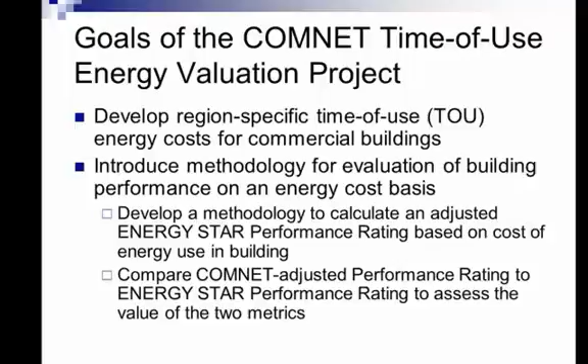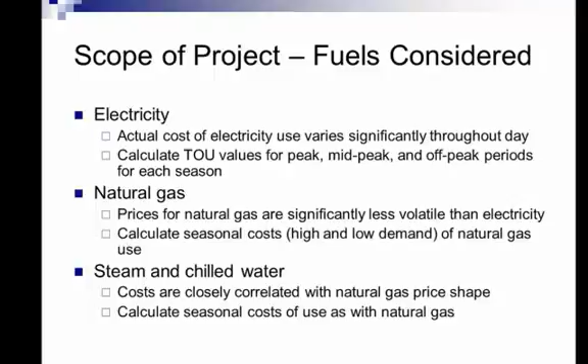Because we're doing an energy cost basis while Energy Star performance rating is in source energy, we have a different metric, and so you can get a COMNET adjusted performance rating from Energy Star, and we'll talk a little bit about that as well. So the scope of the project, and you will see this when you look at Chapter 5, is that we developed basically default values for energy by four different fuels: electricity, natural gas, and then steam and chilled water.

So for the electricity piece, what we try to do for each of the DOE climate zones is look at the actual cost of electricity. What does it cost to deliver a kilowatt hour by season in the peak of the day, mid-peak, and off-peak? So that probably looks quite familiar to a number of people who are used to looking at utility tariffs. There are time of use periods in many utility tariffs with different costs. We're actually fundamentally trying to capture the same thing.

It's higher cost to deliver energy on peak because of all the infrastructure required. So the cost differentials reflect both higher energy cost, worse heat rates in power plants, as well as additional infrastructure that needs to be built to meet the peak load.

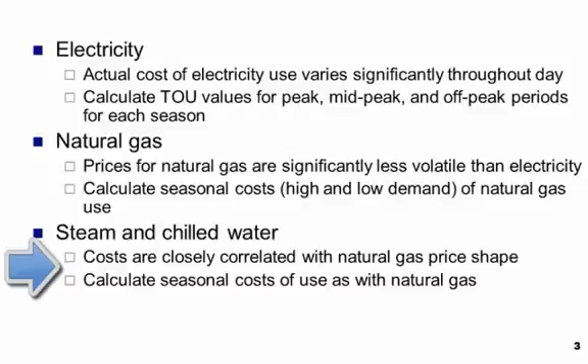For natural gas, there's less day-to-night volatility, but there is seasonal volatility linked to demand. So the natural gas values are higher in the winter, which is the heating season, than in the summer. There's less volatility, but still there are seasonal costs in the COMNET valuation. And then finally, we developed the cost for steam and chilled water. And those costs of developing steam and chilled water are closely correlated to the natural gas price shape. So you will see in there also seasonal cost differences.

So I think I mentioned already, but why use a TOU cost basis rather than just an average rate? What we're trying to do is reflect better the societal cost of providing energy to a building. And with efficiency and improvements to buildings looked at on this basis, we get a more efficient building from a societal value perspective that can help building designers design buildings that are less impactful to the grid and provide overall economic value.

In many parts of the country, the actual retail tariffs reflect the same underlying cost basis that we developed here, so there's a lot of similarities. But what we did is we took a standard method for developing the cost differentials for each of the regions in the country and applied them.

So the framework is consistent. It's not one utility tariff versus another utility tariff. It's kind of generic, if you will, time of use pricing for all regions in the country. And when you do this and you take this perspective, you get quite a different answer when you're evaluating some advanced building features such as daylighting, photovoltaics, thermal storage. Those energy measures or efficiency measures or building features that tend to reduce your on-peak consumption.

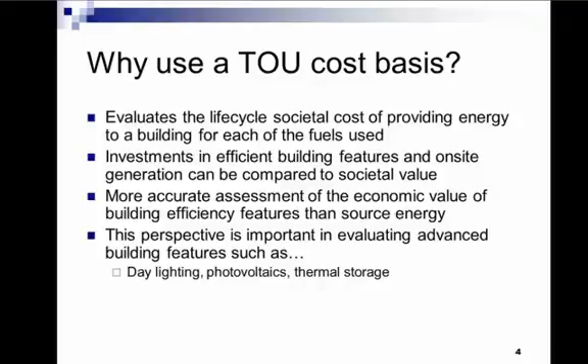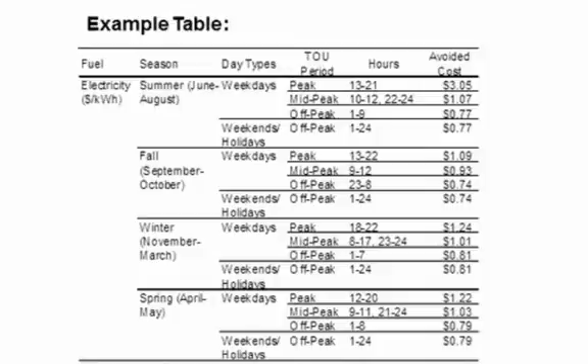So probably many folks have seen this table. When you open to Chapter 5, you will see a set of value tables that are essentially the answer. What it gives you is life cycle avoided cost by the dimensions we talked about. So for electricity, it gives us by season, summer, fall, winter, and spring. The weekdays and weekends are defined separately, and then there are peak, mid-peak, and off-peak values for each of the time periods. For electricity. Gas, steam, and chilled water are simpler. There's just a low demand season, which is the summer, and there's a high demand season, which is the winter.

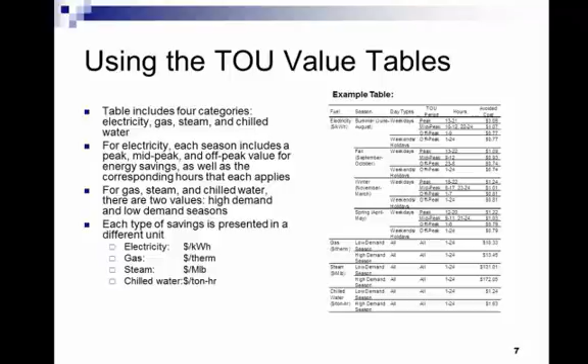I guess I should say, to use these values, these avoided costs can be basically entered into the simulation tools, and I imagine Charles et al. have methods to do that, and then the simulated consumption of your building multiplied by these will give you sort of a COMNET total value.

The other thing that can be done is that the COMNET lifecycle benefits, calculated as I just described, can be converted to source energy for use in the EPA Target Finder. So there are a set of adjustment factors listed again in Chapter 5 for a lookup on how to do that. And there is a unique adjustment factor for each pairing of building type and climate zone. So you would get your COMNET lifecycle benefit, then depending on your climate zone and building type, look up the adjustment factor, multiply across, and it will give you a source energy number.

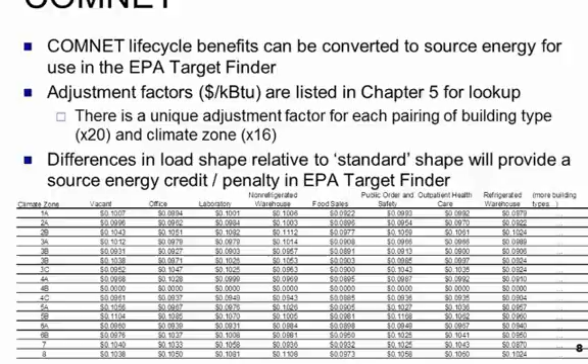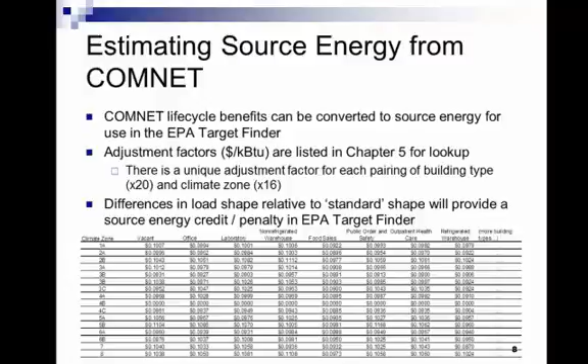I should point out that there are standardized load shapes behind each of these building types and climate zones, and so to the extent your building that you're modeling has a better load shape than the standard, then that will translate through when you multiply by this into a better, lower source energy consumption result.

So how did we develop all of these? Essentially, we divided into each of the four fuels. Most of the effort, because of all of the volatilities, was on the electricity side. To do the electricity piece, we chose 16 cities that are closely based on the DOE commercial building benchmark study. Because of data, I think we had to use Washington, D.C. rather than Baltimore and Fresno rather than Las Vegas, but basically picked the cities. And that gives us a point on the grid to look at what the costs are.

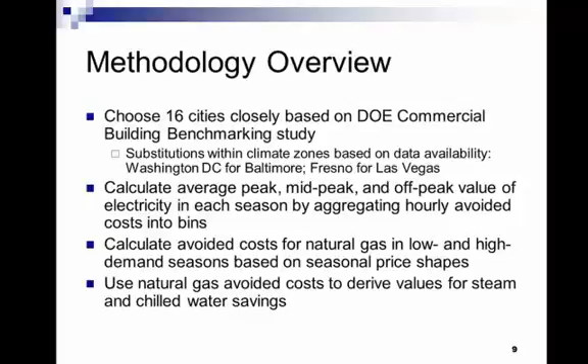We calculated the time of use periods based on marginal cost in each of those hours in each of those cities. Then we also looked at the natural gas delivered to each of those regions, and then with the natural gas, we obviously can compute the natural gas piece, plus the steam and chilled water savings piece is linked to the natural gas, kind of for a district heating or cooling.

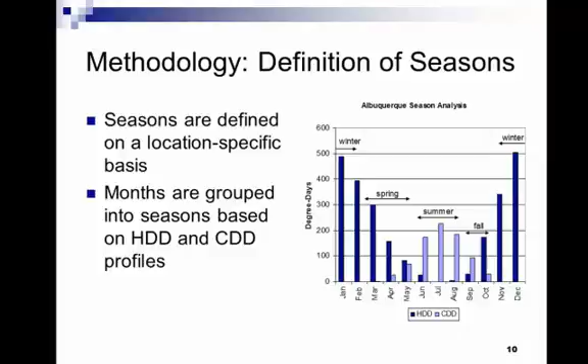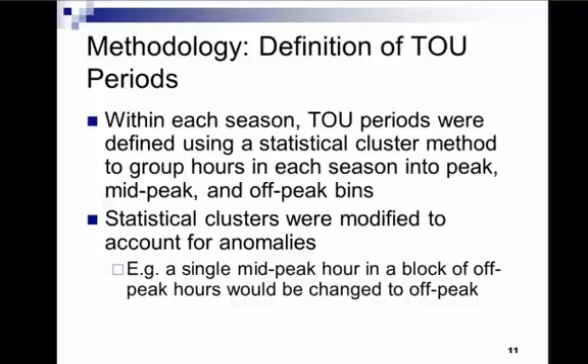So to define the seasons, they obviously need to be defined by the climate zones. Months are grouped into heating degree days and cooling degree days to define what summer, winter, spring, fall is. So the months involved vary depending on where you are. Then we define the TOU periods statistically, basically clustering those hours that have similar marginal cost. This is not that different than what our shop E3 would do for a utility that was trying to define TOU periods for their retail rates.

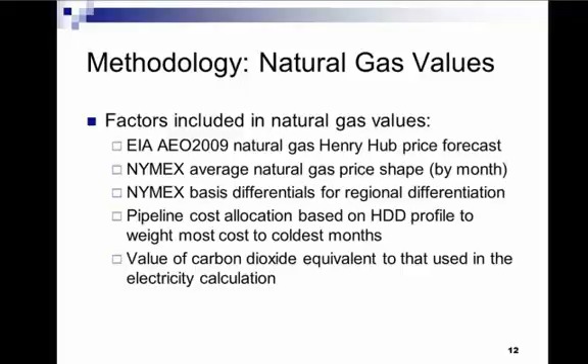For natural gas values, we use the sort of national index, which is Henry Hub in Louisiana. It's the most liquid and commonly traded point of natural gas in the country, from which gas deliveries around the country are indexed. It gives us a seasonal shape, so by month, that we can compute. And then we look at the basis differentials between Henry Hub and other locations in each of the zones. So essentially we build up the natural gas price just like you would if you were a commodity trader trying to forecast what the price of gas was delivered into each of the zones.

On steam, again, we link to natural gas. Essentially what we're thinking about in terms of steam value is district heating, where the generator is in a cogeneration mode and there's excess heat that's being distributed. And because the cost of the generator, which would likely be running on natural gas, is higher in the winter, it leads to higher cost steam. There are some efficiency assumptions baked into that to basically get us, well, how much does it cost by season to deliver that steam?

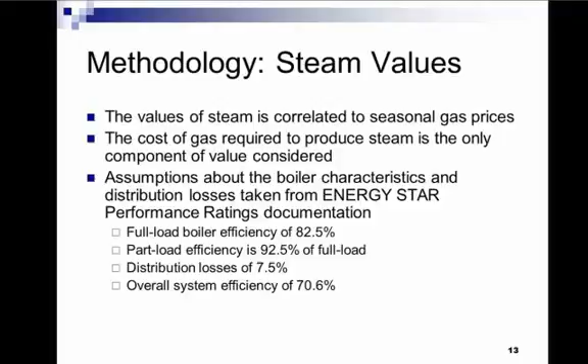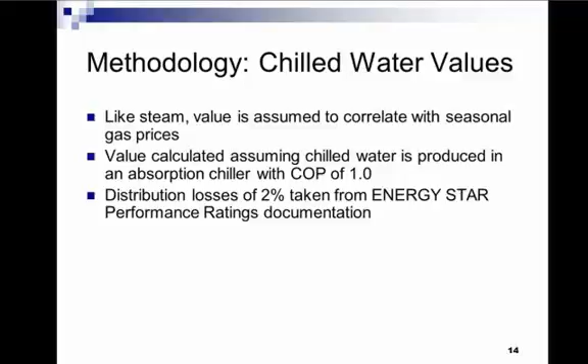And for chilled water, we do a similar thing. Basically look at if we were to take that steam and instead chill water, what would the cost be there, and so on. One thing that has been a source of confusion: our high season for chilled water is still defined as the winter because that's the underlying fundamental cost. So high season for cooling is obviously the summer, but for the value, that's the definition of the seasons in COMNET.

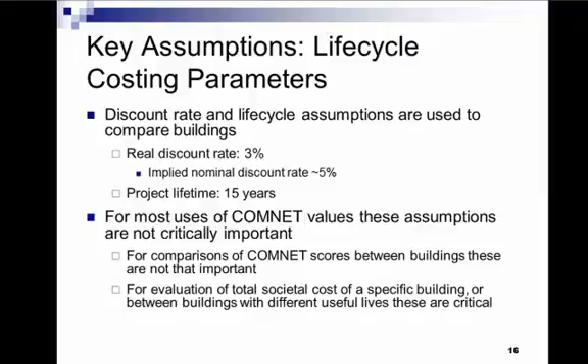So we are looking at life cycle costs. So there are a number of assumptions, as you might imagine, built into that. We've got a discount rate. We used a real discount rate and a project lifetime of 15 years. For most uses of COMNET, the actual life is not that critical. If we did a longer term but then levelized it, or if we were to do a comparison across buildings, it gives us one point, but it doesn't really change the comparison of two scores, as long as this is consistent throughout the analysis.

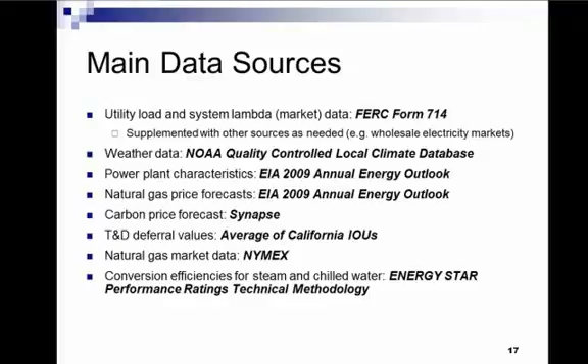So that is my quick run-through. I have a number of appendix slides if folks want to have a little broader discussion in the Q&A session or dig into this deeper. So maybe I should turn it back to you, Charles. Well, thanks, Miller, for that excellent presentation. We'll now open it up for questions.